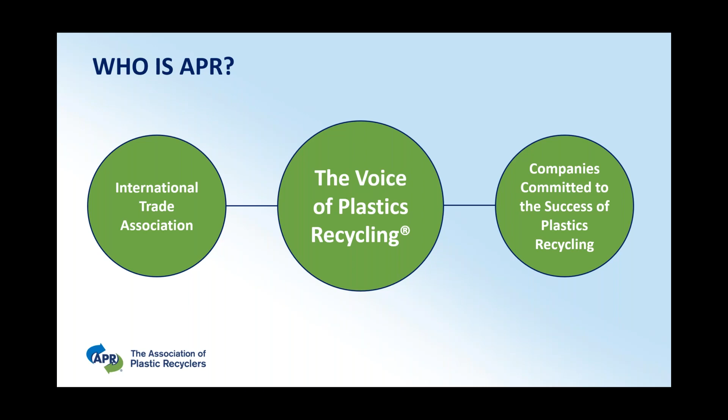We do that through 4 areas. Our primary goals are to increase supply, so get as much plastic recycled as possible, enhance quality - recyclables are our feedstock for manufacturing, so the quality of the recyclables is very important. Expand demand - think about the chasing arrows, we need demand for that which we pick up at the curb. And then communicate the value of plastic recycling.

Today, we're talking about expanding demand. So this really touches upon APR's work around demand. And why is this particularly important now? Well, the state of plastic recycling today.

To tell you the truth, I'm always surprised at how deeply this situation that we're in right now with recycling has been communicated to people outside of recycling. I'll be almost anywhere, the grocery store, and when someone hears that I'm involved with recycling, they'll say, gee, I'm so sorry to hear about China. Oh dear, is recycling falling apart? Well, we do have a perfect storm.

We are in transition. We do have issues, and I've outlined a few of them here. 65% of the curbside collected polypropylene was exported, and almost all of our bulky rigids - think about 5-gallon buckets, that kind of bulky plastic.

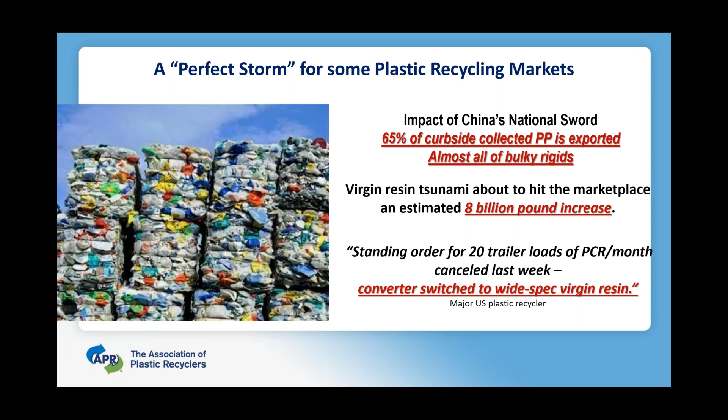Also, we have what I call a virgin resin tsunami about to hit the marketplace, an estimated 8 billion pounds. And then this idea that we don't have major commitments for recycled products. Can you imagine being a company where you have a standing order for 20 trailer loads a month of your product, and it can be instantly canceled because we don't have a lot of long-term commitment to recycling?

I want to spend a couple of minutes on this, what I call the tsunami of wide-spec virgin resin entering the marketplace. 50 million pounds, up to 260 railroad cars per month of this material is going to hit the marketplace. This is often because of natural gas. So we're seeing a lot of virgin material being produced, and this is in direct competition with recycled material.

And this is economics 101. The more supply that's out there, and if we don't increase demand, then prices go down. And that's just one more difficulty for recycling.

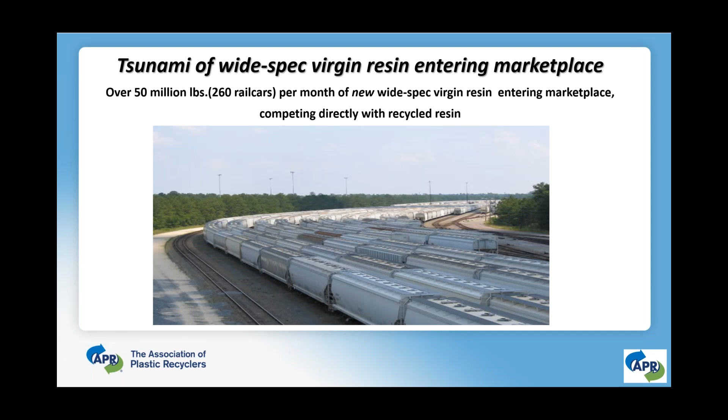For residential plastic recycling to be sustainable, there must be sustainable plastic recycling markets. Think of the chasing arrows - maybe one arrow being the material picked up, the second arrow is the material being processed. But if we do not have the third arrow, if we do not have markets for these recyclables that we're picking up, then the chain is broken and the system falls apart and it is not sustainable.

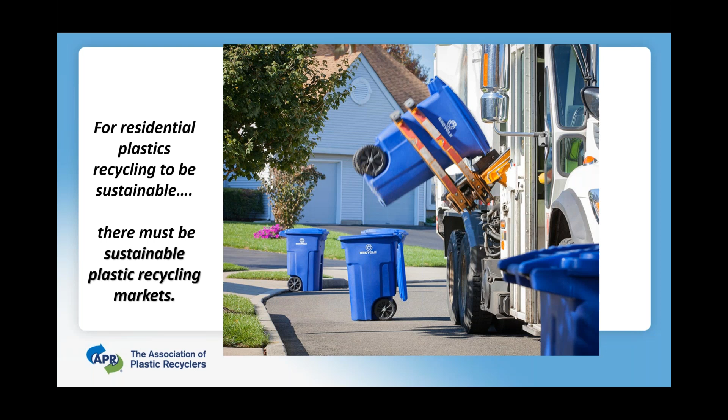Can we continue picking material up at the curb if we don't have sustainable domestic markets? I think what's happened with us putting all our eggs in one basket for certain plastics and exporting them was a weakness in our system. And we're trying to correct that.

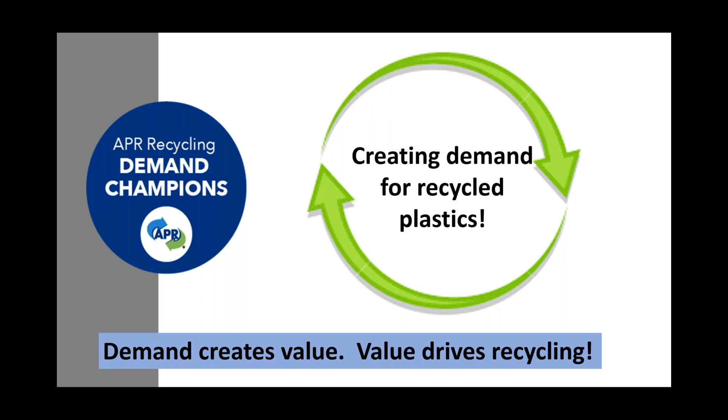So the APR Recycling Demand Champions is a program that is creating demand for recycled plastics. Demand creates value, value drives recycling. And really that gets us to what we're all about today. 6 months ago, I was so pleased to discover that the new AASHTO specs allowed for plastic pipe products to contain PCR, post-consumer resin.

That just changed things. And that's why we're here today, is to talk about that, learn about that, discover how we can have this make a difference with domestic plastic recycling. Have this make our domestic recycling stronger, help ensure that the plastics that get picked up at my home, the plastics that get picked up at your home are going to continue to get picked up.

So APR has partnered with the Northeast Recycling Council, NERC, on a multifaceted plan, and this is part of it. You see that I've highlighted webinars. They're going to do a number of things that I hope many of you on this webinar today can access, to help you get involved in having more infrastructure pipe be used that contains PCR.

There'll be a manufacturer's directory, case studies, overview material. We'll be educating as much as we can via this webinar. We'll be working with DOTs in the NERC region that haven't yet approved AASHTO, and as importantly, measuring the impact of the project. So with that, I'd like to close off my comments because we have a lot of important information to hear, and I'll pass it back to you, Lynn.

Great, terrific Liz. Could you please pass it to Michael Pluimer? I will, thank you. Hopefully I've successfully done that. Oh, you have. Michael, yay. Now we just need, what's it called, slideshow, and it'll be perfect. Thank you.

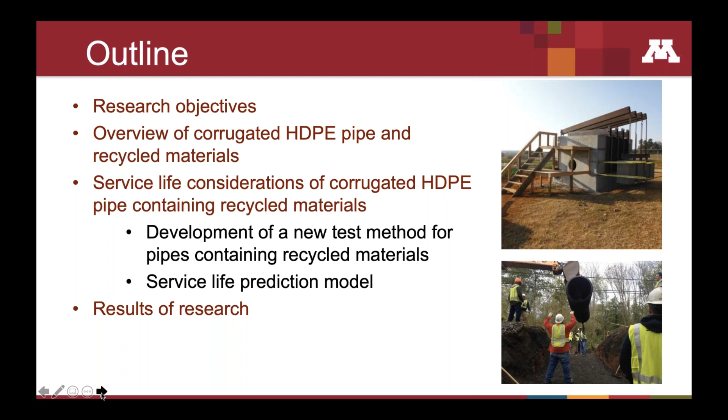I'm going to go over our research objectives quickly, talk about corrugated HDPE pipe for those of you that may not be familiar with the product, and talk about really what was the thrust of this research with regards to service life, because if we're going to make any change to a specification, we want to make sure that change is not going to hurt or adversely impact the service life of the pipes used for our infrastructure applications. Then I'm going to talk about the results of the research.

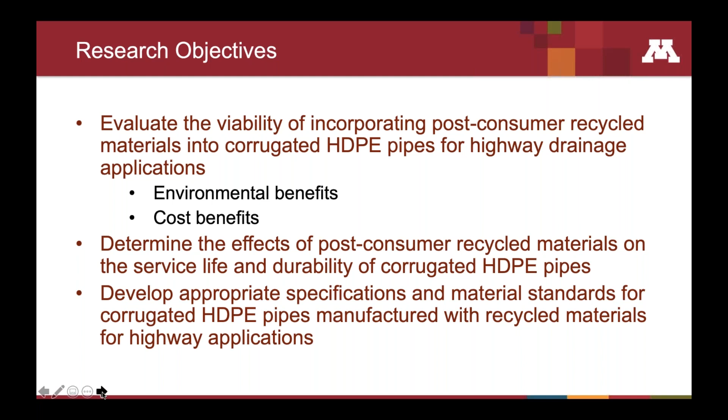The main research objectives were to evaluate the viability of incorporating both post-consumer and post-industrial recycled materials into these pipes. We focused largely on post-consumer recycled materials, and I'll talk a little bit about that in a moment. We wanted to determine the effects of these materials on the service life and durability of pipes, and then develop a specification that would allow these products, if the research deemed it appropriate, to be used in these applications in highways and underneath railroads.

There were three primary research sponsors for this work. NCHRP is the National Cooperative Highway Research Program, and it's basically a state-funded program. States pool money together for projects and research that they're interested in, and then it gets voted on with regards to which projects actually get funded.

There was a number of states that had an interest in using more sustainable materials for their infrastructure applications, and therefore they funded a couple of large research projects that funded this work: NCHRP Project 4-32 and 4-39, which was a follow-up project to 4-32. I'd also like to note that the Southeastern Pennsylvania Transportation Authority sponsored some of my PhD dissertation work by further evaluating these pipes. So I'm going to talk about all three of these research projects.

Corrugated pipes are typically used for storm sewers, culverts, and other land drainage applications. They're manufactured in small diameters of 4 inches up to 5 feet in diameter, so these can get very, very large. The pipes typically used in culverts underneath your roads are larger diameter pipes in the neighborhood of 12-inch to 60-inch diameter.

The 4-inch pipes are used for smaller drainage applications, either agricultural drainage or some of your edge drain applications on highways. These are attractive products just because they are very durable, resistant to corrosion and abrasion, and they can last a long, long time, so they have some benefit with regards to that for our infrastructure applications.

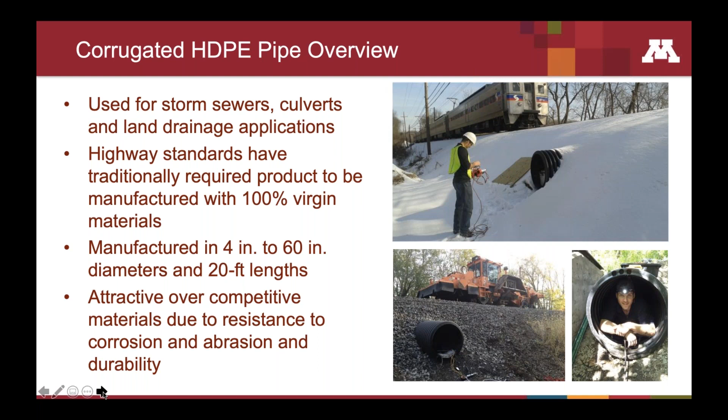Traditionally, these pipes have been required to be manufactured with 100% virgin materials, and that's been in place as long as the standard was in practice, which is probably over 20 years. For the last couple of decades or so, these pipes have been required to be produced with only virgin materials. We studied both post-industrial recycled materials and post-consumer recycled materials, and the standard now allows both of these types of materials to be used, either post-industrial or post-consumer.

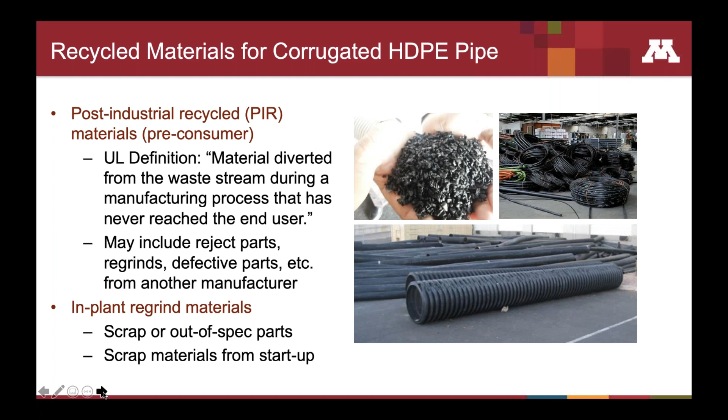Post-industrial materials are those that have never reached an end user. There isn't a lot of these materials; there are some used in our applications, but by far the most dominant material for these applications are post-consumer recycled materials, which in this case are all polyethylene materials that we're looking for - your laundry detergent bottles, milk bottles, things like this that are made out of polyethylene that can be reprocessed.

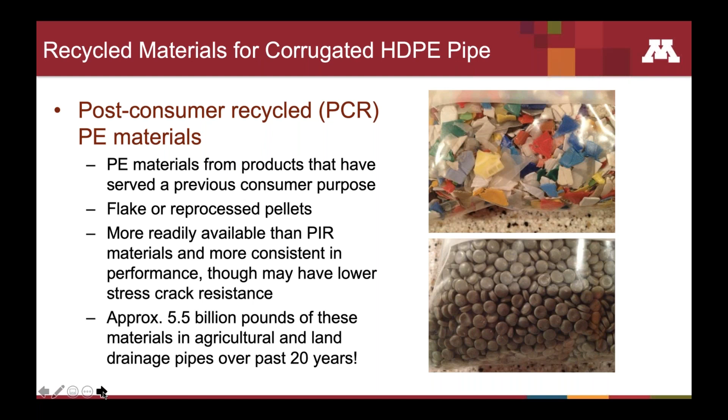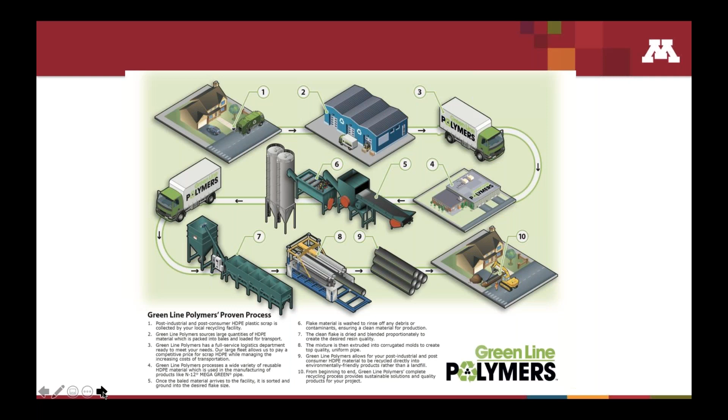Stage 3 failures are chemical in nature, and those are generally prevented by adding enough antioxidant or ultraviolet protection to the pipe to prevent UV degradation or oxidation. That's a well understood mechanism that the industry has known for a long time, and we know how to ensure stage 3 failures don't occur. So the main thrust of our research was stage 2 - how can we make sure that failure curve is pushed far enough out to ensure 100-year service life?

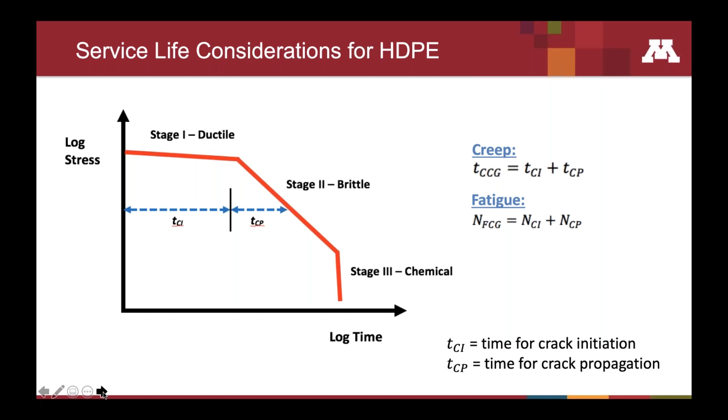The stress cracking mechanism has historically been assessed in the corrugated pipe industry using notched tests, where we put a small notch in a test specimen, apply constant stress or load, place that dog bone coupon into a test bath at elevated temperature to accelerate failures, and then wait for it to crack and fail.

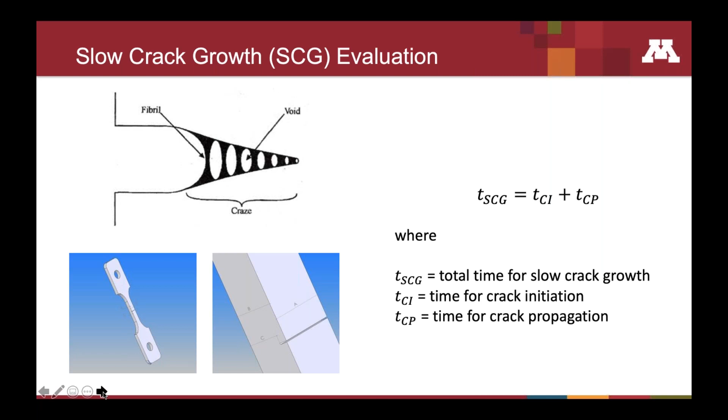With recycled materials we had to think differently, because if we used this same notched test, we wouldn't understand or find the effects of contaminants on the stress cracking mechanism. So we ended up inventing a new test. Rather than the traditional notched test, we came up with a similar design but involving unnotched specimens, so that when a specimen fails or cracks, that crack is initiated by a contaminant, letting us understand the effects of contaminants on the service life of these materials.

Some contaminant caused this specimen to crack, and then the crack propagated right or left of that specimen, and eventually we saw ductile tearing on the end of the specimens. So the idea was to invent this new test method, and then try to relate that time to cracking to the service life of the product.

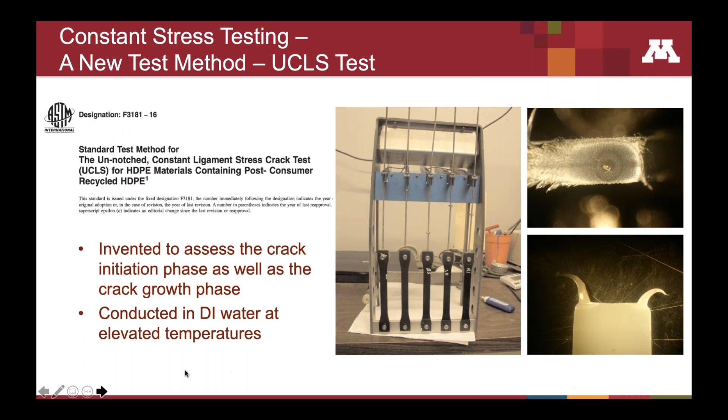These are some images of contaminants that generate cracks in the specimen, and that was very typical of what we saw. So the way we related that cracking time to service life is to conduct that test, the UCLS test as we called it, at least 3 different temperature stress conditions.

The reason we do that at 3 different conditions is you'll notice the equation, particularly the lower one, the rate process method, has 3 constants in it, A, B, and C. So the way we want to solve for those constants is to have at least 3 different equations. If we have 3 equations, we can solve for those 3 unknowns and determine the log T, which is the log of time to failure, as a function of stress and temperature.

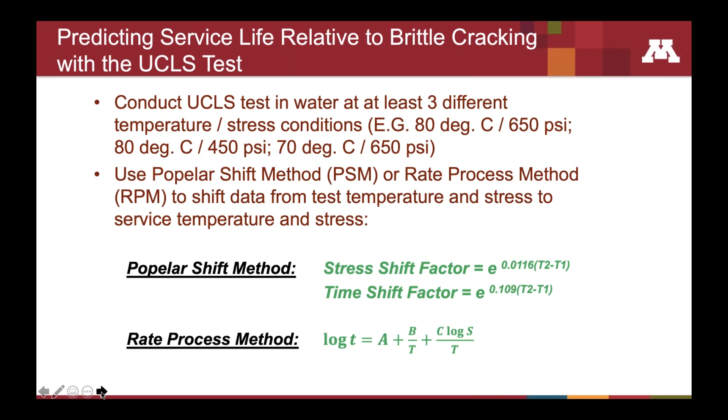Alternatively, Popelar's shift method is similar in nature, but it involves basically biaxial shifting, where we shift the test data at elevated temperatures to more appropriate temperatures of which the pipe will be installed in service applications. So let me show you how this is done.

So basically we would take testing at 3 different conditions, conditions 1, 2, and 3. Condition 1 was conducted at 80 degrees C, 650 psi stress in elevated water. The 80 degrees C is an elevated temperature water bath. Condition 2 is conducted at that same temperature, 80 degrees C, but at a lower stress of 450 psi. And condition 3 was conducted at 70 degrees C, a lower temperature, and at that same 650 psi stress as condition 1.

The next thing we do is we apply those shift factors, the Popelar shift factors, a vertical shift factor and a horizontal shift factor. And those shift factors are simply functions of the temperature difference from your desired service temperature and your test temperature.

By doing those shift factors, we can then map a data point, shift that data point, to some service temperature. 23 degrees C is a fairly conservative assumption for the temperature of a pipe in a buried application, say in a state like Florida or one of the southern climates. In Minnesota, where I live, we're going to be shifting that even further to the right because it's going to be much, much cooler than 23 degrees in an in-ground condition.

We can do that same shifting for the other 2 data points, and what we get is what we call a master curve. And that master curve has that same slope as that brittle curve, that stage 2 curve, that I showed you from earlier.

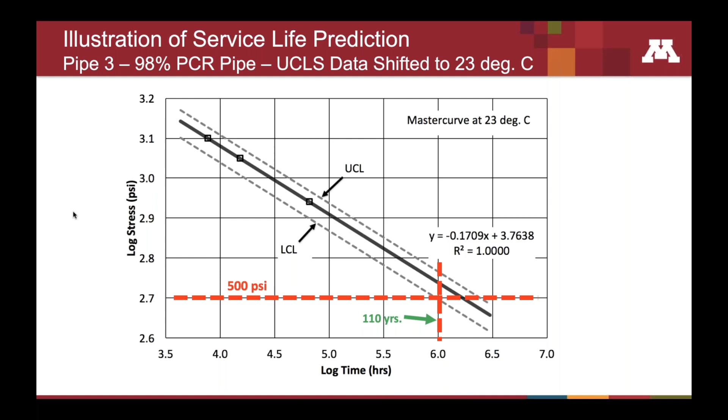One way to test that would be to install a pipe so that the stress was 500 psi on it and wait around for 110 years and see if we had failures. That didn't seem to be too attractive of an alternative, particularly for somebody like me that was trying to finish my PhD dissertation in a timely manner. So we needed to accelerate the test in order to validate, and we did this by two ways.

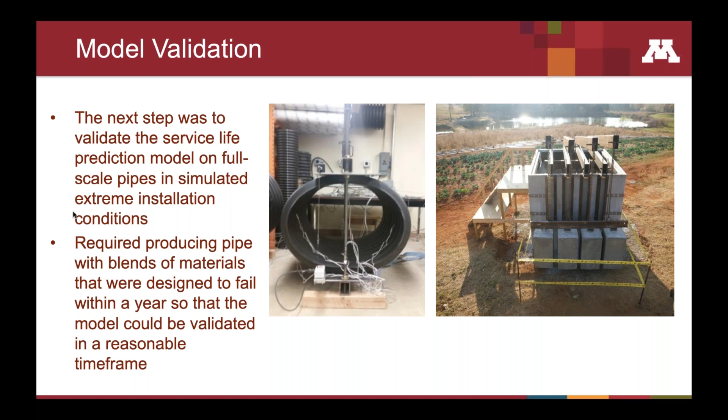One, in the laboratory, by installing some pipes under very high deflections and stresses, much higher than what would ever be observed in the field. And secondly, by doing the same thing in a simulated field test, where we compress the pipes under very high loads with very poor backfill conditions to see how long they would last in that condition.

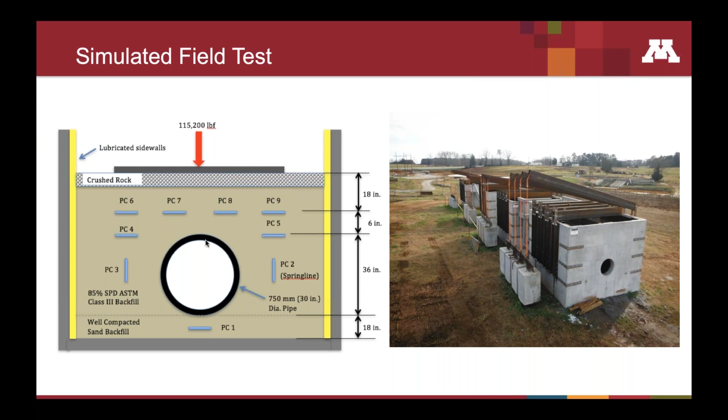This is an image of our pressure cell that we compress the pipes in. Each of those concrete weights weighed 2,000 pounds. You see there were 4 of them hanging on each chamber, and we had a 12-to-1 mechanical advantage with that loading mechanism, so we were generating in excess of 30 to 40 feet of fill on those pipes with a very poor backfill condition, so we were really stressing these pipes.

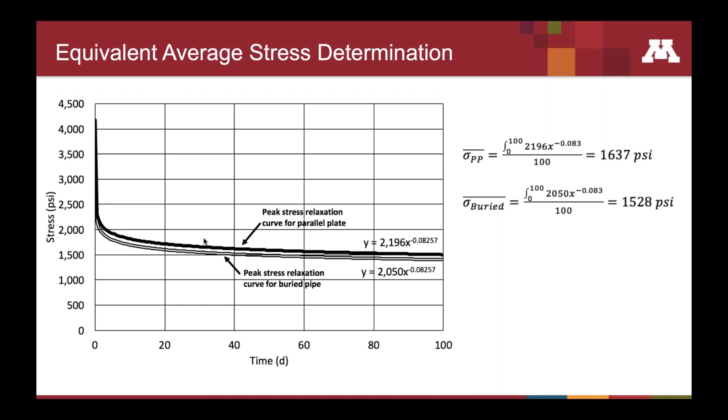This is some finite element modeling we did to assess how high the strains and stresses were in the pipe wall. We established curves to come up with an average stress over the duration of the installed pipes, and we found that under these conditions, in that parallel plate test in the lab, we reached a stress of about 1,600 psi, which is over 3 times what we had used for the service life prediction model.

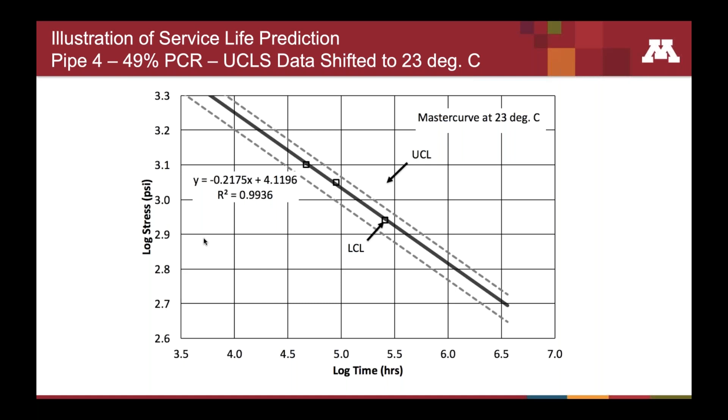In the buried pipe test, we made it to 1,528 psi. We can go back to these service life projection curves, and instead of projecting our failure time at 500 psi stress, we go to that stress level and create a failure window for when that pipe would be expected to fail in the field due to brittle cracking. So the 49% post-consumer recycled pipe would fail in a relatively short time, 1.4 to 3.2 years, still a little bit longer than was desirable for our project.

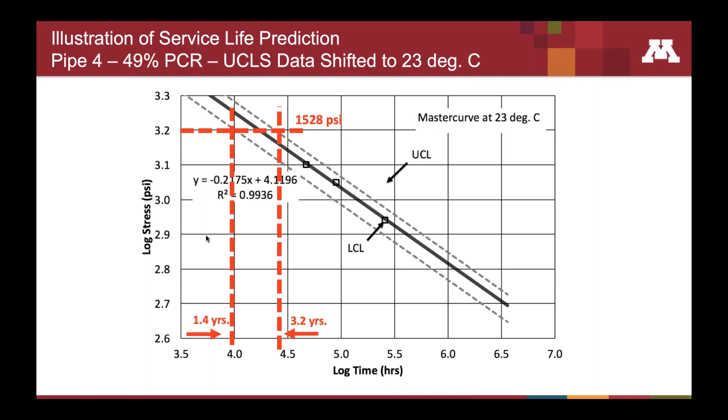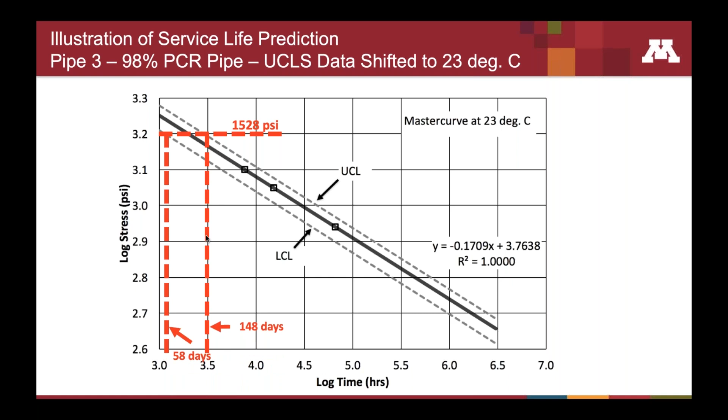That's why we had to manufacture some pipes with intentionally poor grades of materials to try to generate short failure times. We did that on pipe 3, which was projected to fail between 58 and 150 days.

What we found is that every single pipe that we predicted to crack within our predicted time frame did experience cracking within that time, and those that we did not predict to crack did not crack within our projected windows. So basically we went 9 for 9 on every single pipe that was tested, matching our predicted results in the model.

This image shows one pipe with 98% post-consumer recycled material that generated cracks, and that crack happened to occur within days of when we had predicted it to occur.

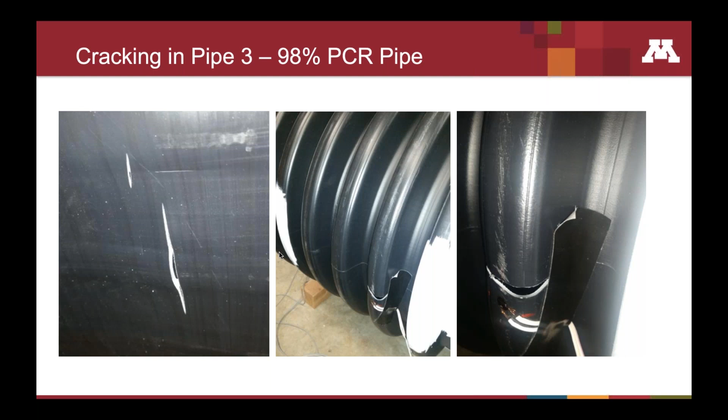So we felt that the model was justified. Incidentally, I've spent about 20 years of my career working in the plastic pipe industry, and I can say this is the only time in my 20 years that I was actually happy to see a pipe that cracked, because it really validated our model. We would have had to start over from new if we were not able to validate this model, so that was a very exciting part of our research.

So again, every pipe that was predicted to crack did, and those that were not predicted to crack did not. The beauty of this is that it's given us our first performance-based standard for these products. Prior to this, there was never a performance-based standard for pipe materials, and now we actually have that. So that was very, very exciting.

Note also that these are validation tests, and they're very extreme. They're not typical of actual installations, and the pipes were formulated with blends of materials designed to crack within a reasonable time frame.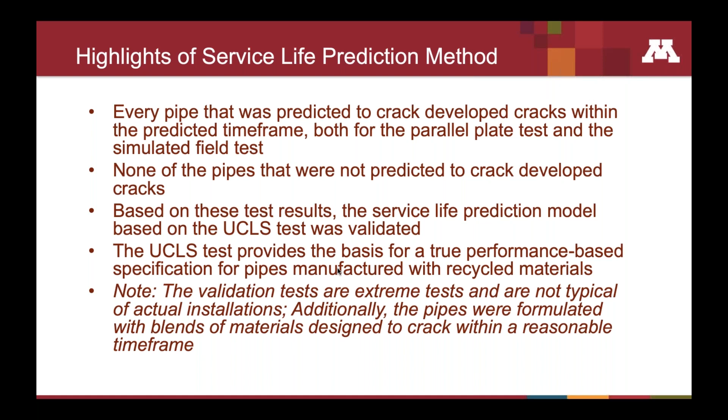The final part of the presentation I want to discuss is a 3-year study we did with pipes underneath railroads. Now these pipes have actually been in service for 6 years, and I'm formulating a follow-up paper on their performance after 6 years of service. This was an interesting application because we wanted to see how well these pipes would perform in an actual application where it was very highly loaded.

So we picked a railroad application, as rail loads are typically higher than highway loads. And we went even beyond that, doing a very aggressive rail application where we only had 2 feet of cover from the top of the pipe to the bottom of the railroad tracks.

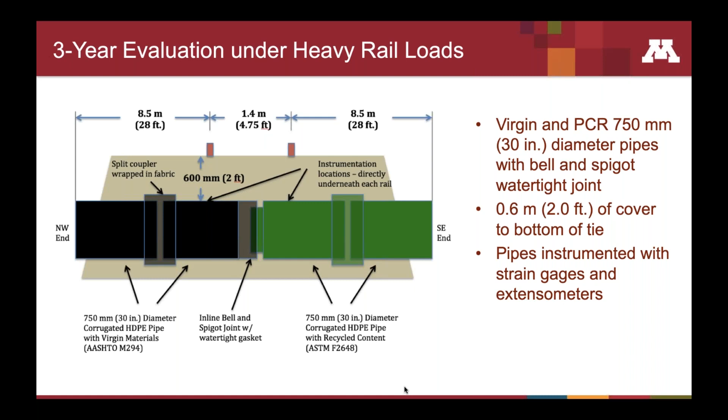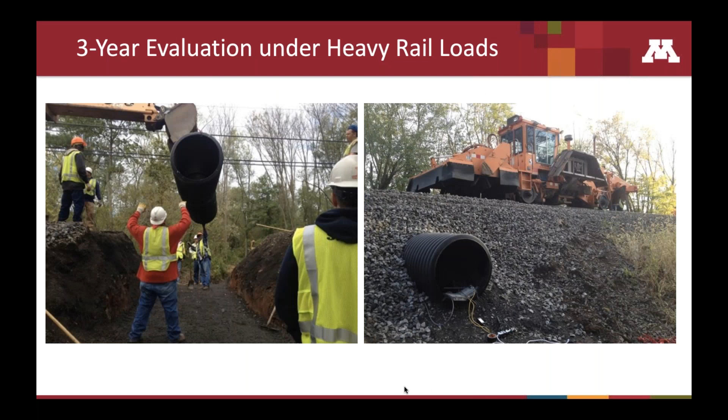The pipe on the left, the black one, is manufactured with virgin materials, and the pipe on the right is manufactured with recycled materials. We coupled them end to end so that both pipes were seeing the same exact load from the railroad cars. We instrumented these pipes with strain gauges as well as string potentiometers to record deflections and strains in the pipe wall. We shut down the track for a day to do a complete installation, then monitored the loads in the pipes over time to see how they performed.

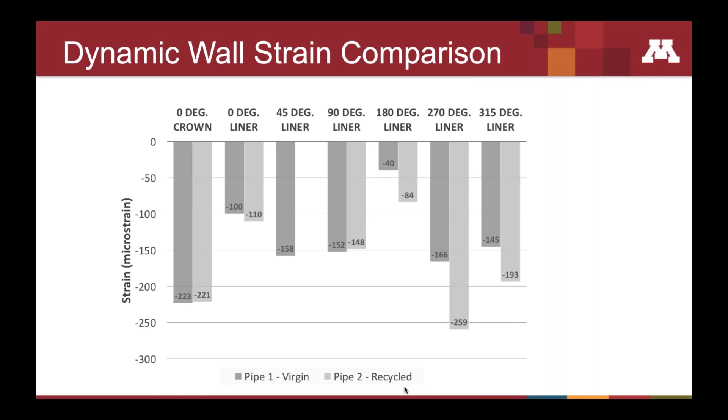What we found is virtually no difference between the pipe manufactured with virgin material, in the dark gray bars here, versus the pipe manufactured with recycled material. They performed pretty much identically throughout the entire duration of the test, and we found that there was no difference in performance.

Out of this, we were able to draft some revisions to the AASHTO specification to include recycled materials. In there, I do apologize, I have a slight typo. We have a 33-hour UCLS requirement, but it's actually 34 - there was a rounding issue on this slide, so I apologize for that. That standard was balloted in 2017, and it was passed, and then published in June of 2018.

Then we had some revisions to the bridge design specifications, also published around the 2018 timeframe. The new ASTM test method that I discussed earlier was published in 2016. And then just this past year, a new AASHTO standard recommended practice was developed.

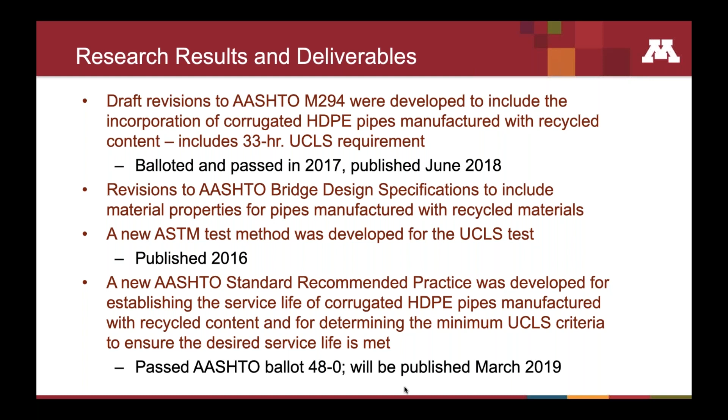This is a really great practice in that any state Department of Transportation, if they want to find out how long their pipes manufactured with recycled materials will last, can take a pipe and take some coupons of material from that pipe and follow the methodology I outlined in this service life recommended practice, and project how long those pipes will last under their given installation conditions. That was balloted this last year and published in March of 2019.

So now the current M294 standard allows either virgin or recycled materials to be used. The cell classification, which identifies the material properties, are identical for both pipes, M294V and M294R. The NCLS, which is the notched constant ligament stress requirements, are identical for the two pipes. For the pipes manufactured with recycled materials, we require an OIT test, which is an oxidation induction time test, which ensures that those stage 3 chemical failures do not occur.

We also require an elongation at break test for the M294R pipes, as well as that UCLS test I mentioned of 34 hours. We finally require that virgin pipes are marked as M294V, and recycled pipes are marked as M294R. That 34-hour test is designed to ensure that pipes manufactured with recycled materials will last in excess of 100 years at a factored wall stress of 500 psi.

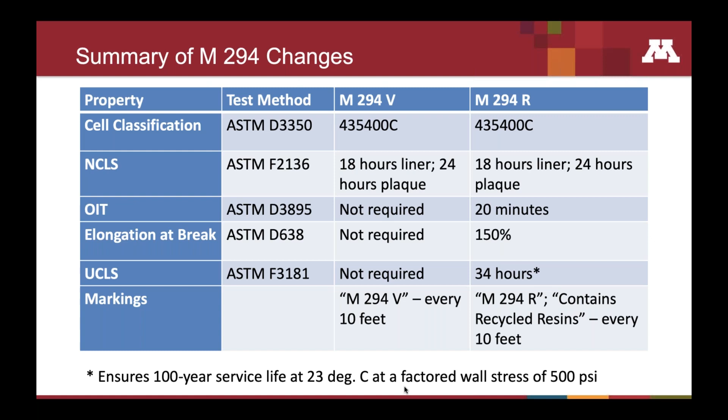Quite frankly, I think the research on this project is extremely robust, and I have great confidence in the M294R products. I think, from a material performance standpoint, they're even a better material than the M294V products, in my opinion, just because we have incorporated some of these other tests that will further ensure their long-term service life.

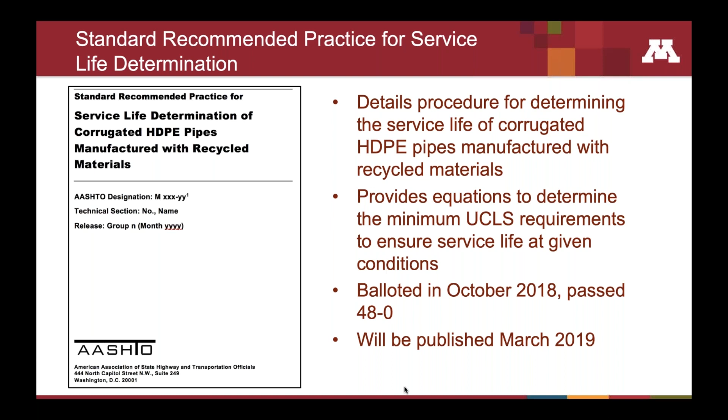This is what the standard service life recommended practice looks like. We simply have an equation, which is a fairly easy equation, although my students might complain about this C factor that they have to calculate to get to the final answer. That said, it's a relatively easy equation where we can simply calculate the time to failure required to achieve a given service life at a given service temperature, and it's a fairly straightforward calculation.

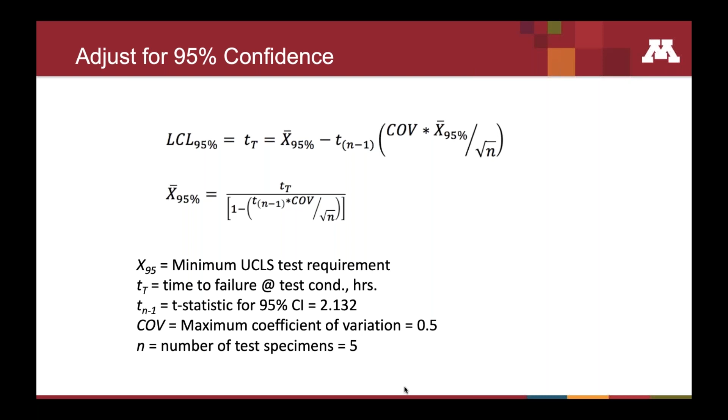Statistics are not so straightforward, but that said, that's all rolled into the final calculation as well.

The purpose of the project was really to evaluate the viability of incorporating post-consumer recycled materials into these pipes for highway drainage applications. The revisions to M294 were adopted in 2018, and now every state that specifies M294 products can use pipes manufactured with recycled materials.

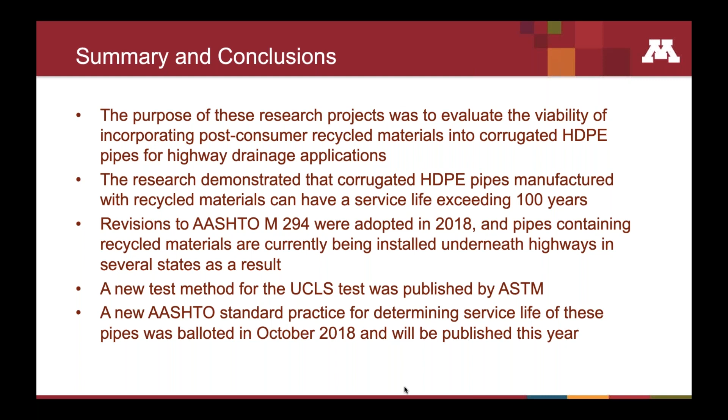We really feel it's going to be a game changer, both for the industry as well as for states, because frankly, it's a much more sustainable way to produce and manufacture pipes. So I think it's something that states will benefit from greatly. We've developed a model that ensures those pipes will last in excess of 100 years, and it's a benefit to the recycling industry as well as to the pipe manufacturers, because they can now use some more materials that they previously were not allowed to use.

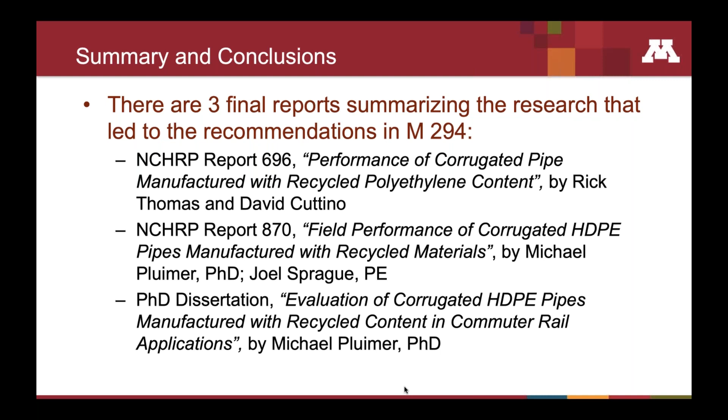There are 3 final reports summarizing this, so if you have more interest in reading further, these will be included with the slides and the references available. With that, that concludes my presentation.

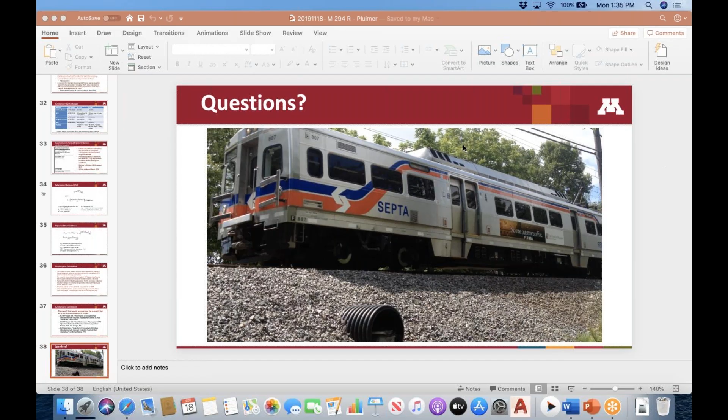I'm going to give a quick, brief introduction to what AASHTO is, what the National Transportation Product Evaluation Program is, how that relates to AASHTO, and what NTPEP is doing for the evaluation of M294 material.

So without further ado, what is AASHTO? AASHTO is a nonprofit association founded in 1914. Our members include all 50 state transportation departments, additionally Washington, D.C. and Puerto Rico. We also have associate members as well, which may be federal members, local agencies, or other countries such as the Ministries of Transportation in Canada.

And AASHTO covers more than just roads and highways. We cover aviation, rail, water, and active transport such as cycling.

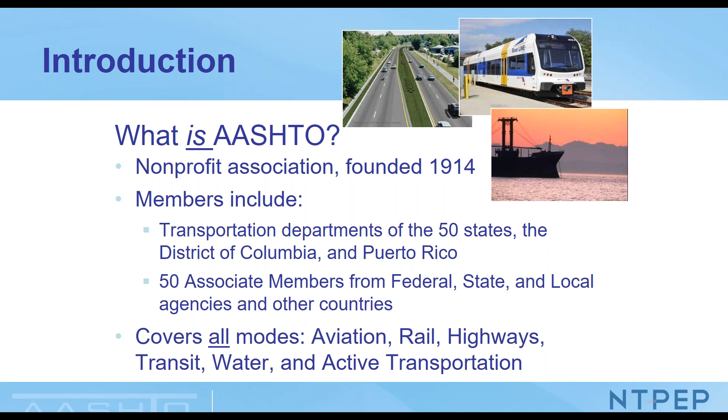What does AASHTO do for its members? To clarify, when I use the word members, I'm referring to state DOTs. So all 50 state DOTs are members. We work together to develop transportation solutions. We try to create economic prosperity, enhance the quality of life, and improve safety in our communities, states, and the nation as a whole.

We deal in these main sectors here you see on the screen: policy development, advocacy, technical services, leadership development, advancing partnerships, and promoting innovation. Where the National Transportation Product Evaluation Program falls is under technical services, and we'll get there in a few slides. Real briefly here, I just wanted to put up our leadership.

Currently the president of AASHTO is the CEO from the Missouri Department of Transportation, and our vice president is from the New Hampshire Department of Transportation. AASHTO is overseen by a board of directors, which is created by each CEO from each Department of Transportation, and they report to our executive director, who is Jim Tymon.

AASHTO also breaks the country up into 4 regions. So in the Northeast, we would be part of the NASTO group, which oversees that region. When we come together for our national meetings, they represent what we call Region 1, or the Northeastern region.

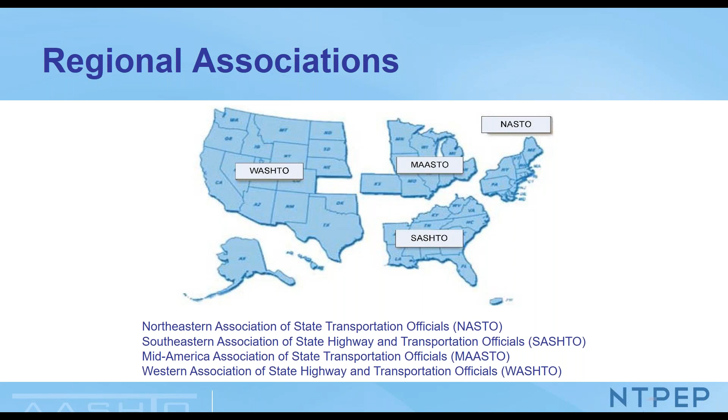This is a huge org chart, but I just want to give you a real brief, quick understanding of where NTPEP falls. NTPEP is what we shorten the National Transportation Product Evaluation Program to. It falls under the Council on Highways and Streets, which then reports to the Board of Directors.

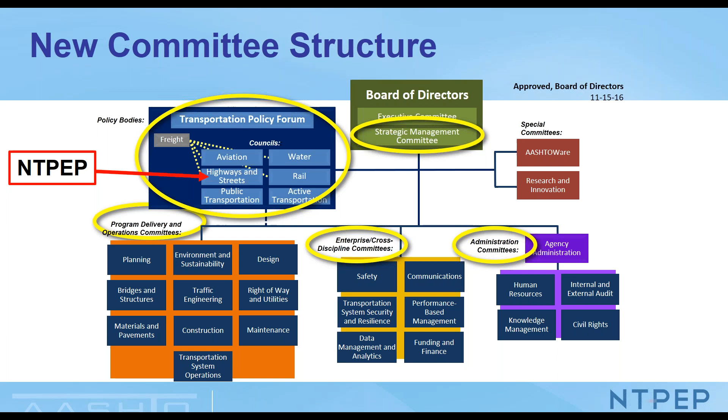So what is NTPEP? Like I said a few times now, it stands for National Transportation Product Evaluation Program. This technical service program was founded in 1994, and it reports to the Council on Highways and Streets. It's a partnership between AASHTO, member agencies, and industry participants. Unlike a lot of AASHTO groups where it's just state agencies, this one has members of both industry and states. We try to combine the professional and physical resources of AASHTO member departments in order to evaluate materials, products, and devices of common interest for use in highway and bridge construction. Our primary goal is to provide a cost-effective evaluation for AASHTO members.

So just in some quick bullet points here, we want to simplify the product evaluation process. We want to make it more cost-effective for both the manufacturer and the end user. One important thing is we don't want the end user, which would be our member states, to have to evaluate a product from all different manufacturers when it's all the same process. On the same side, we don't want manufacturers to have to ship their product to all 50 states to be evaluated when one evaluation can be done and shared with everybody.

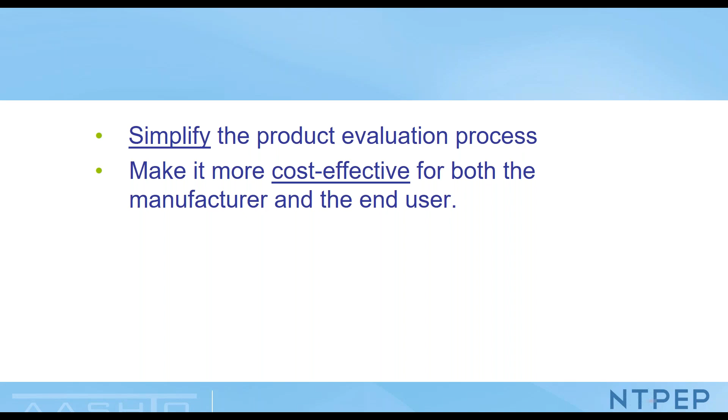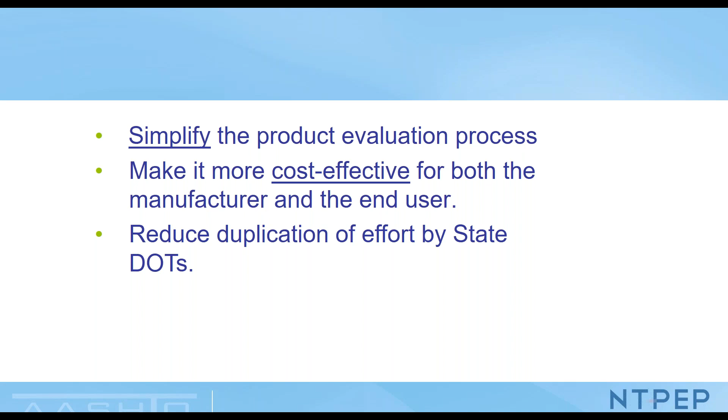We try to reduce duplication of efforts. So along the same lines, we don't want Ohio doing something and then Pennsylvania doing the exact same thing. If we can share those resources, that makes everything a little bit easier. We also want to serve as a one-stop shop, so people can come here, have their products evaluated, and states can log in to the secure website and access information for not just plastic pipe, but any of the products we offer. It becomes a one-stop shop where they can get the information they need.

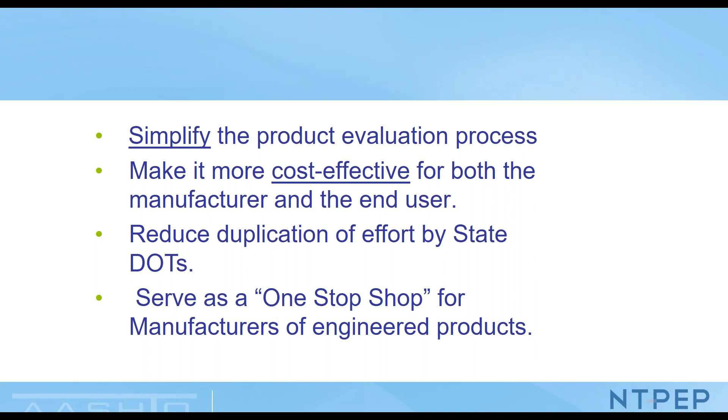There's a desktop review done initially - a thorough review of their quality management system, which follows in line with SP01. Once that's complete and everything is found to be in order, we conduct an on-site audit. Then once the on-site audit is complete, we work with the manufacturer to resolve any findings or fix any issues.

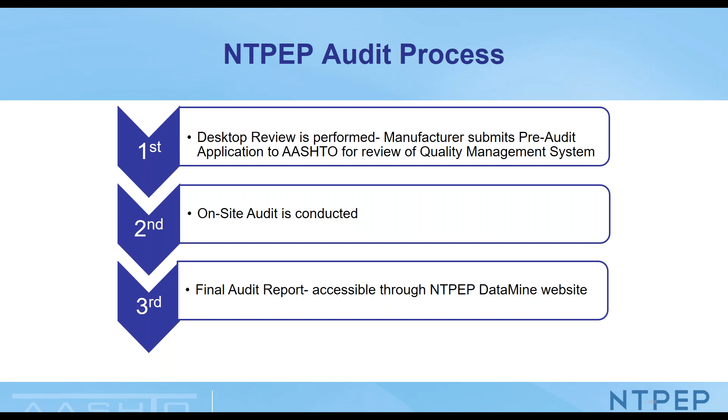All of that is made available through the NTPEP DataMine. The NTPEP DataMine is a secure database which any state DOT with a state email address can gain access to. You can log in, select the product you want to look at, and see every manufacturer of that product who participates, along with all their data. Additionally, it's the same site where manufacturers submit their applications to be evaluated and put in any initial information.

A quick overview of the audit programs: the manufacturer must follow an established quality control program. The quality management system should provide assurance that the products meet the requirements of either AASHTO or ASTM standards, the NTPEP Technical Committee Work Plan, NTPEP Standard Practice for Audits which is SP01, or a combination of all three. Each individual product has a work plan, and that work plan dials into that specific product. So while SP01 looks at the overarching quality system, the work plan ties specifically into, say, plastic pipe for recycled material - here's what you have to do. All of these are approved and reviewed prior to any on-site audit.

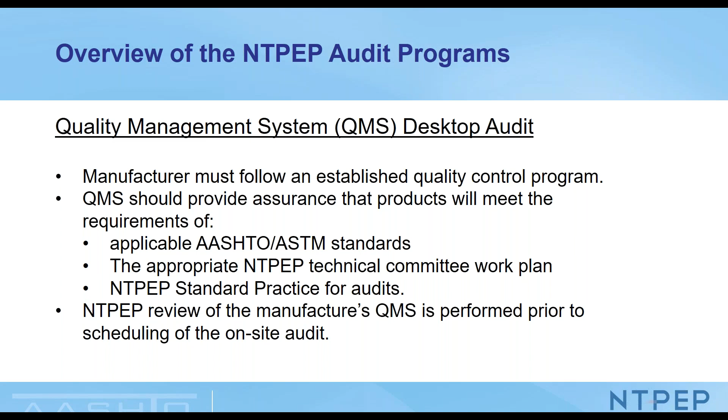During the on-site audit, NTPEP performs an initial audit, then comes back every year for another audit. The evaluation covers production and quality control testing. We make sure that what they say they do in their quality management system, they are actually implementing on site. We make sure they have the test reports, equipment calibrations, verifications, that they're doing any required daily checks, they have traceability, and that they can follow all that paperwork.

Additionally, our audits are open to any state member. If you're with any state, our audits are always open door. We notify all our state members of every single audit we're doing, and if you'd like to participate, you can just get in contact with anyone at NTPEP, and we'll make sure the facility is aware that you're going to be joining our auditor for that audit that day.

A little bit more on what the on-site audit includes: we touch base on document review, but there's also a production inspection, so we'll walk the production line and they'll show us what daily checks they do, what shift checks they do, anything along those lines. There's also a storage yard inspection, where we check for identification, make sure all the markings are correct, make sure they know when and where this material was made, where it's coming from, and that it's properly tagged. We also do a quality control testing evaluation - we go into the laboratory located inside the production facility, and any tests they have to do, either per shift or once per month, we verify that testing and make sure they're running it in compliance with the correct ASTM or AASHTO specification.

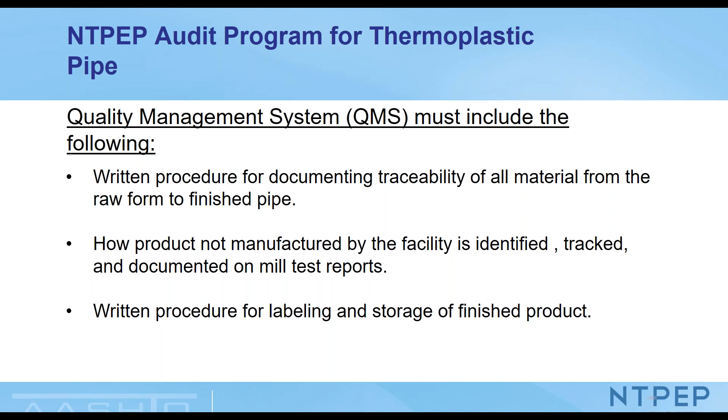When the auditor's on site, we'll go out to the yard and randomly select a few different pipes made on different days, different shifts within the last year. Then we'll trace all that material back to the resin that initially came into that facility, either a virgin resin or, in the M294R case, a recycled resin.

So once we go through all that and trace it all back, the auditor also selects a few different pieces of material to be tested. So if a M294R material is selected, all the tests you see on the screen would be tested at our third-party lab. Additionally, the manufacturer would also run those same tests on their product as well.

They'll submit the data to us, and our third-party lab will also submit the data to us. What we provide the states with is what we call a comparison test report. It shows the data from the NTPEP designated lab directly alongside the data from the manufacturer. The states can look at that and see if the numbers are similar, if there's any variation. It also allows us to see if maybe a piece of equipment may have gone out, or if someone might be running the spec incorrectly, because you'll start to see they might meet the minimum, but they vary a lot from their private lab that is also running to the spec.

So that's the final report that we issue along with the audit report that gets uploaded to DataMine. As you'll see in the bottom right-hand side, the 4 tests - OIT, elongation at break, density, melt index, and UCLS - are all in red. The reason those are in red is because these are finished pipe tests that are not required for virgin pipe, but are required for recycled pipe. So there's a little bit extra testing, which causes the cost of testing to go up slightly for the recycled material.

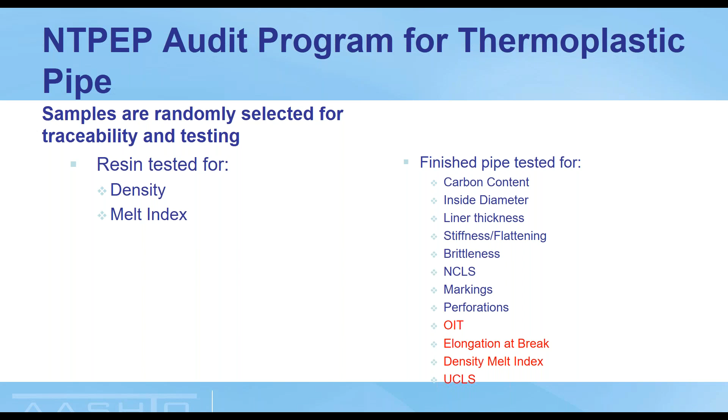The final thing we issue on DataMine is a compliance authentication document. This document is given to each facility. It indicates that they're compliant with the Thermoplastic Pipe Technical Committee work plan for the year. These documents can be downloaded. Some states require these to be submitted to them.

What I always tell everyone is just because you have a document doesn't mean they're compliant. Make sure you're reading their reports, you're checking the corrective actions, make sure you're doing your due diligence to make sure, even if they resolve the corrective action, that it meets the needs in your state as well.

So that's pretty much a really quick, brief overview of the National Transportation Product Evaluation Program and how we handle plastic pipe. Here's my contact information. At the end here, we'll have some more time for questions, but I'm going to turn it over to Joe.

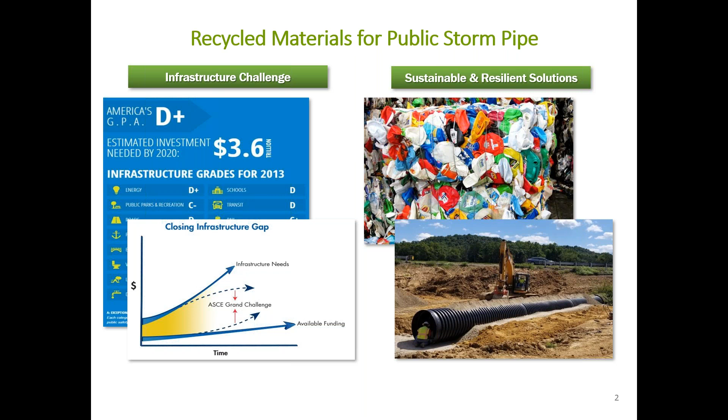For example, the bottom right-hand photo is a 60-inch culvert made out of recycled material underneath a state highway in Ohio. The picture above that is a bale of recycled material taken at one of ADS's post-consumer recycling facilities. We're taking single-use plastics that maybe have a 6-month service life and turning them into a product that will last over 100 years. It's something everyone can be proud of.

ADS has what we call our Green Line Polymers division, a solely owned subsidiary of ADS. We have 8 domestic recycling facilities, and annually we recycle over 400 million pounds of HDPE every year. It's a great story.

In many cases, those curbside recycled plastics—Tide bottles, milk jugs you put on the curb every week—get made into corrugated HDPE plastic pipe and put under the curb, so to speak, as drainage pipe later on down the road. It's a good sustainability story, a good story about the circular economy—taking household items that would otherwise end up in a landfill and making long-lasting products out of them.

Part of ADS's product evolution story: about 13-14 years ago, only about 24% of our products were made out of recycled material. Moving ahead over 13 years, instead of 24%, we're all the way up to 57%, and I'd expect that number to grow as we move forward, especially with the addition of this new AASHTO M294 recycled standard.

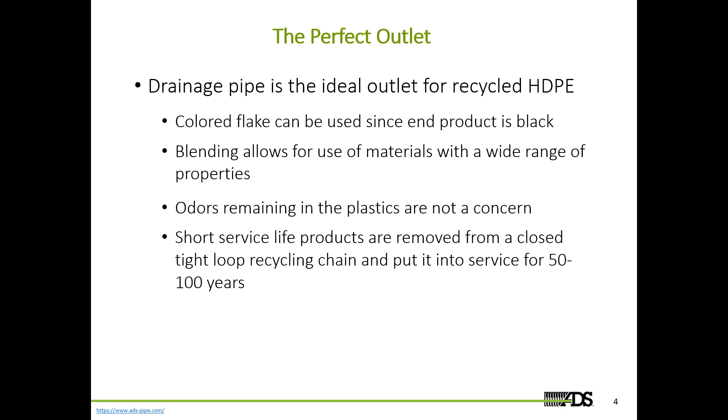Unofficially, ADS estimates that about 25% of all pigmented HDPE that's curbside recycled actually makes it back into our drainage products every year. These are just some powerful statistics about the scale of how much post-consumer curbside recycled material actually makes it back into our corrugated HDPE product.

As I get going into the research project that ADS pursued, it's basically about material property variability. How can ADS ensure, as a manufacturer, that when we're using post-consumer recycled material, post-industrial recycled material, and in some cases virgin material, blending those items together, we're making a pipe that meets the AASHTO standards and is going to last 100 years. ADS puts an inordinate amount of time and effort into making sure we're making a great product that meets all the quality control standards. We're going to go into a little tutorial and show you how we do it.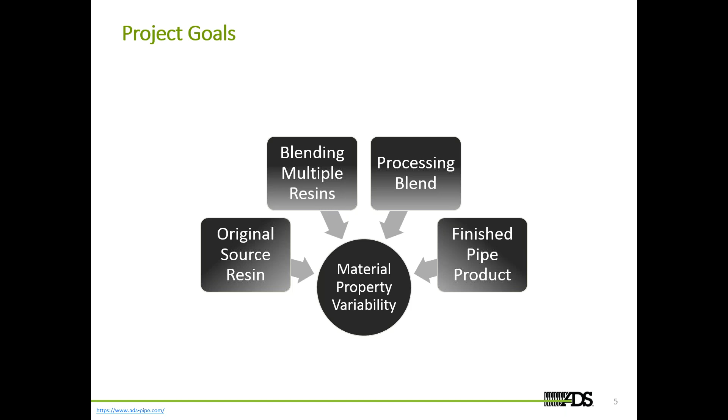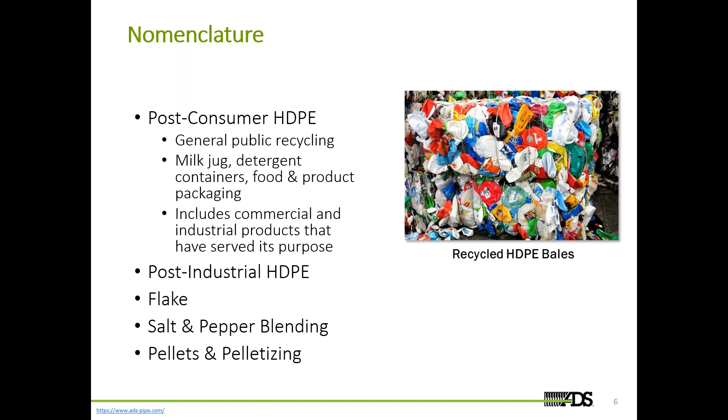Just to talk about some nomenclature as we move forward: when I say post-consumer HDPE material, that's general public curbside recycled material. We're talking milk jugs, Tide bottles, Tropicana bottles, detergent, all those items. It typically also includes some commercial and industrial products that have served their final purpose.

When I start talking about post-industrial HDPE, these are a lot of times excess or rejected bottles from different manufacturers. It might be bottles, crates, drums, dunnage—things that typically aren't used by consumers, but might be reject parts from different manufacturers. So that's what I'm largely talking about when I say post-industrial HDPE.

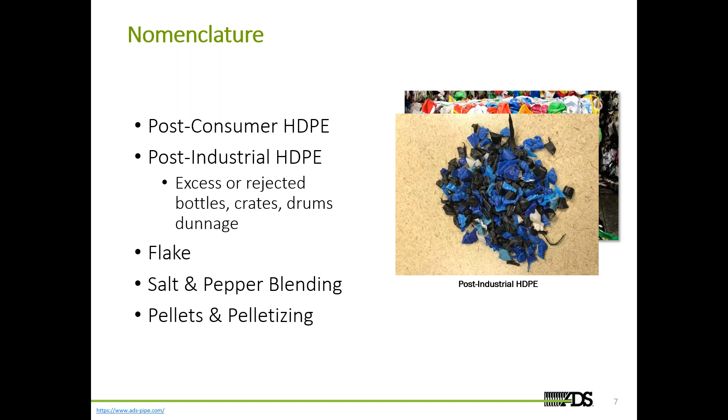When I start talking about flake: ADS has 8 domestic recycling facilities. When we purchase HDPE material, it comes to us in bales, so those post-consumer plastics are still largely in their original form, whether they're Tide bottles, milk jugs, or whatever. ADS then processes that material—we sort it, wash it, shred it, dry it, and wash it again. After we get done processing it, it is what we call flake. Here's a good photo of what we consider flake—that's the shredded up post-consumer or post-industrial recycled material.

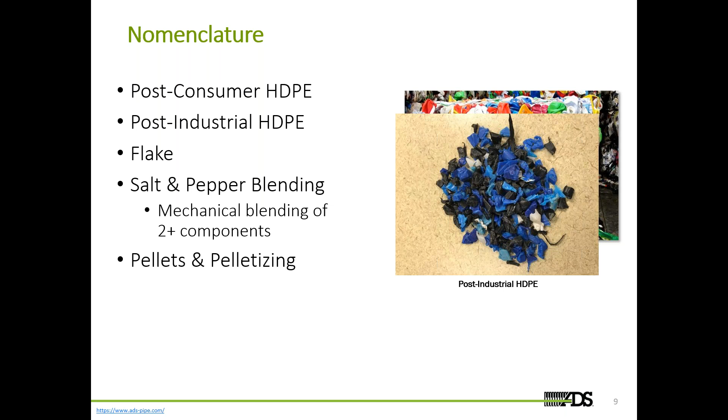When I say salt and pepper blending—part of the research in the AASHTO project looked at what salt and pepper blending can do to your overall homogenized performance of your material blend. That's taking two different types of flakes, whether it's post-industrial or post-consumer, and blending them together to make a homogeneous mixture of flake.

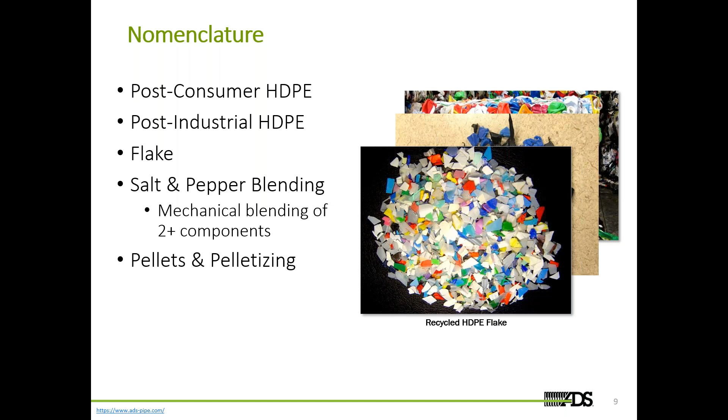And then finally, pellets and pelletizing. I think Michael had a similar photo in his presentation. After ADS processes that post-industrial or post-consumer recycled material, we have it in flake form. Before we make it into pipe, for the most part we then make that flake into pellets. There are two large reasons why we pelletize before making the pipe. One is increased homogenization of that material—when we take that flake, whether from post-industrial or post-consumer sources, we homogenize it by making it into pellets.

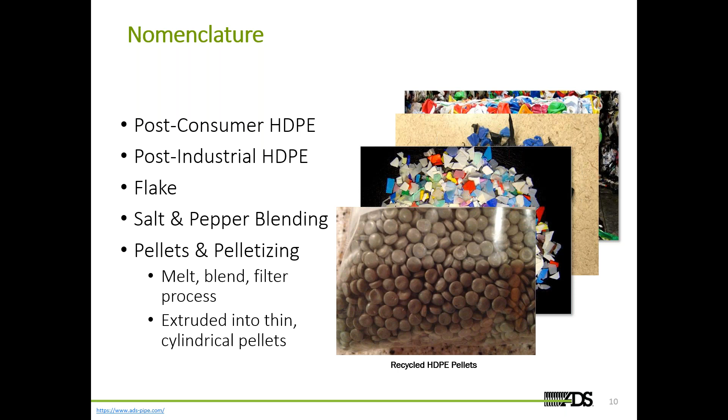The other reason is that one of the largest contaminants we have when making HDPE pipe is polypropylene. Many of the items you recycle day in and day out, like milk jugs or Tide bottles—the bottle or jug itself is made of polyethylene, but the cap is made of polypropylene. It's very difficult for us to hand sort those caps away from the jugs. One way we handle that is after processing the material, we melt it. Since polypropylene and polyethylene melt at different temperatures, we can melt-filter out the polypropylene and make the polyethylene that passes through that filter into pellets to make good pipe.

The way ADS looked at this experiment, this study, was to track how different raw material streams varied in their properties at each step as we went through the process of making finished pipe. You're going to see the data as we go forward.

So again, we're looking at those stage 2 failures through stress cracking that HDPE is prone to, and we're trying to see if we're hitting the minimum stress crack values required under the AASHTO specification, and B, when we're looking at the UCLS test, making sure we're not getting any contaminants in our pipe through processing of our post-industrial and post-consumer recycled material.

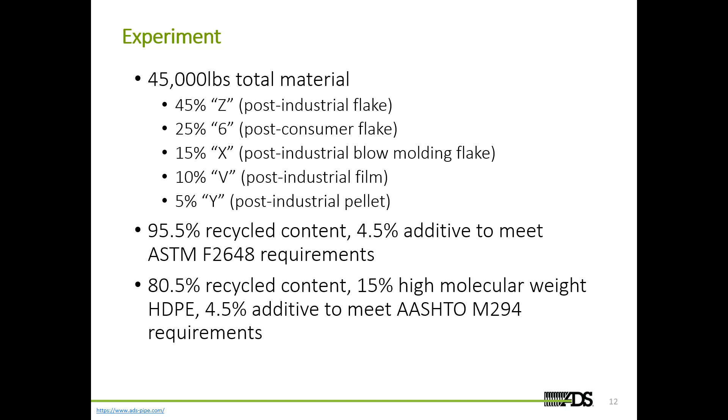We actually made 2 separate pipe types out of this. Much of, if not all of, the presentations on this webinar were focused around the AASHTO M294R product. There's also another recycled pipe product with a specification out there, but that product is not for public applications - it's geared more to private land drainage applications, like agricultural applications or private stormwater, such as a McDonald's or Chick-fil-A, where ASTM F2648 is used. We looked at both pipe types as we were doing this experiment.

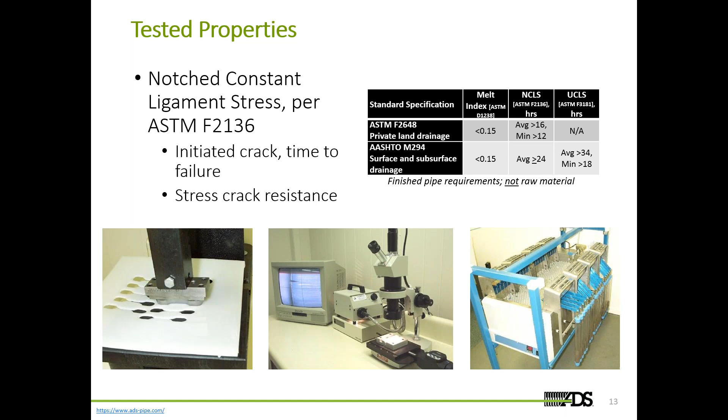I'm not going to get into the nitty-gritty of both tests we looked at. I think Michael had a similar slide on the NCLS test, but the NCLS test basically looks at the stress crack resistance of HDPE, and the UCLS test looks at the stress crack resistance and crack propagation time due to the presence of a contaminant.

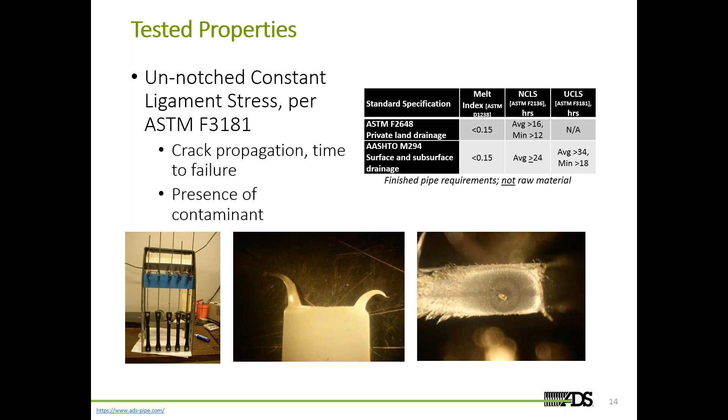The one nice thing about it is that it's consistently poor performing. So as we're bringing in raw material streams, specifically post-consumer recycled material, we have a pretty good idea what it's going to be - rather poor performing, but consistently poor performing. Knowing that, we can then blend different raw material streams, whether it's a very good recycled post-industrial material or other virgin materials, to help make up for that poor performing stress crack resistance.

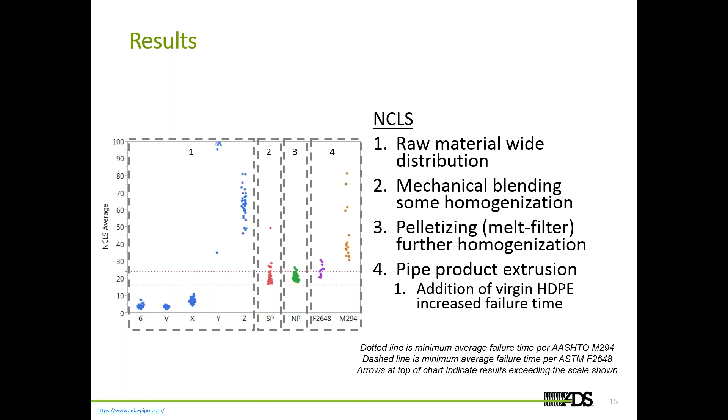Again, a rather similar story when you're looking at NCLS or UCLS and those different raw material streams. That 6 material is the post-consumer recycled material. Comparing that to the post-industrial flake films, you can tell it's by and large a poor performing material. But as we move it through our raw material streams, that SP material at the bottom is basically a salt and pepper blended, homogenized material - material among all those raw material streams that was homogenized by mechanical means.

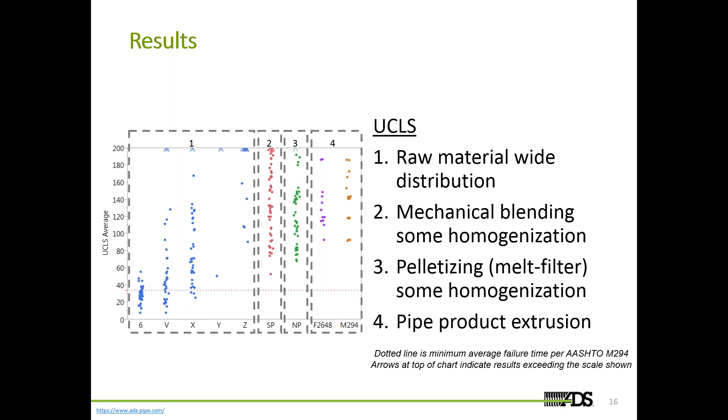You can see there's a pretty large bump in performance in the UCLS just by salt and pepper blending all of those raw material streams, and we get another fairly sizable bump in performance when we pelletize that material - that's the NP column. Then as we make it into pipe, into both F2648 product and M294 pipe product, the material performance in the UCLS test increases even more.

So when we're looking at the significance of pelletizing to variability, when we're taking our raw material streams, it helps if we salt and pepper blend, but it actually helps even more if we pelletize that material. That's why, when Dr. Pluimer spoke about pelletized material, he noted that while you could make pipe out of flake if you really wanted to, in reality you really shouldn't make that M294 product out of flake. It's better to make it out of pelletized material because you get a more consistent result.

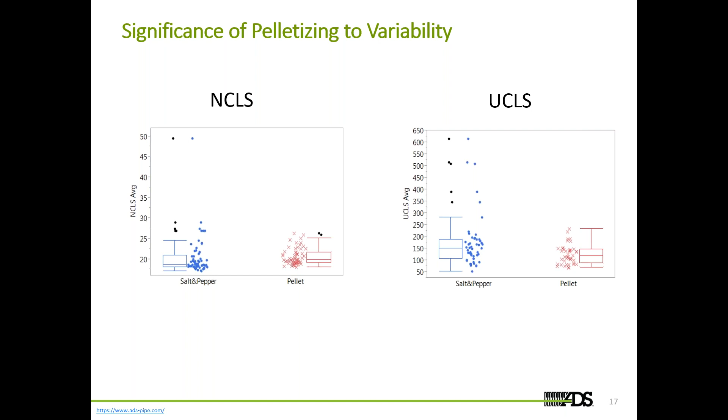Just kind of conclusions of the study.

Raw material testing alone does not predict final product performance. There are several different blends that go into making a finished product. That's why it's important the specifications are built around what Dr. Pluimer called a performance-based specification.

Mechanical blending, or salt and pepper blending, facilitates homogenizing the material. You get a statistically significant reduction in variability with pelletizing salt and pepper by melting it down and making a pellet out of it. Also along in the process, we saw a significant increase in stress crack resistance in both NCLS and UCLS, when we added a high molecular weight virgin material in the blend to meet the AASHTO M294 specification requirements.

Hold on here, I think my computer just froze, but more or less that was my last slide. So Lynn, should I throw it back to you?

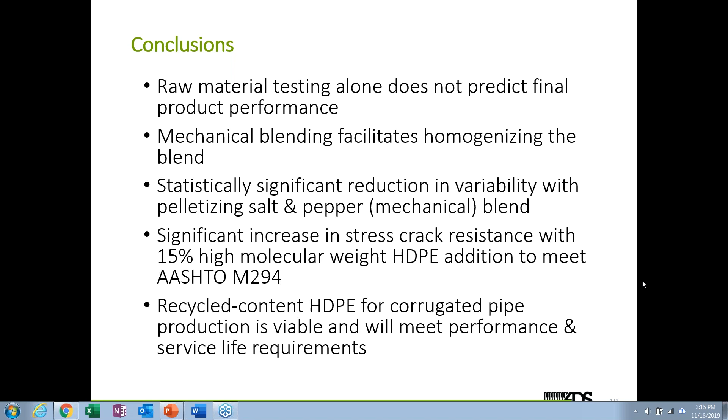There are a number of questions about possible applications for these pipes, but there are also two that relate to price, and I wanted to start with those. Somebody who I'm going to guess is a recycling coordinator wanted to know if they might enjoy a discount on purchasing a pipe. Joe, they didn't say this, but I'm going to play this out as if they were buying it from ADS, if they were able to sell you their baled HDPE. So could they do kind of an actual closed loop system, with their material coming to you and then having value from that, and buying pipes at a discounted rate?

I would be happy to speak to that individual offline, but when you're talking about price of pipe, that's way above my pay grade, so to speak. Okay, well, I will be sure you two are connected with each other.

And then there were a couple of questions about, is there a real price comparison, we're not asking for actual price, but just proportional, between the pipe that are M294V as opposed to M294R. I think that probably several of you could chime in on that. Are we seeing a real price differential there?